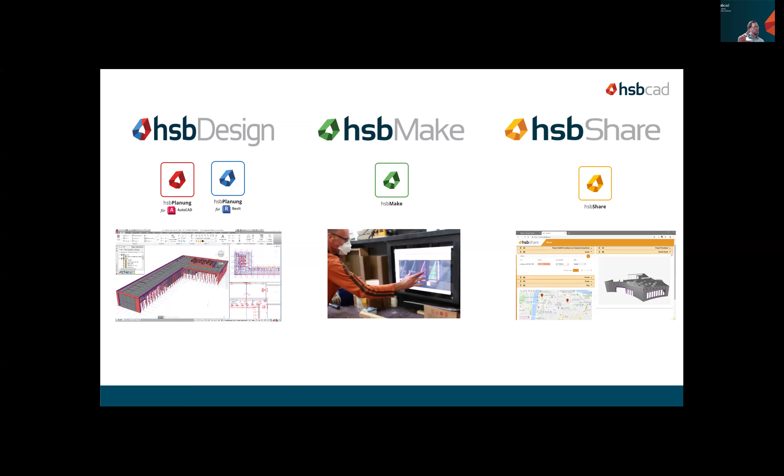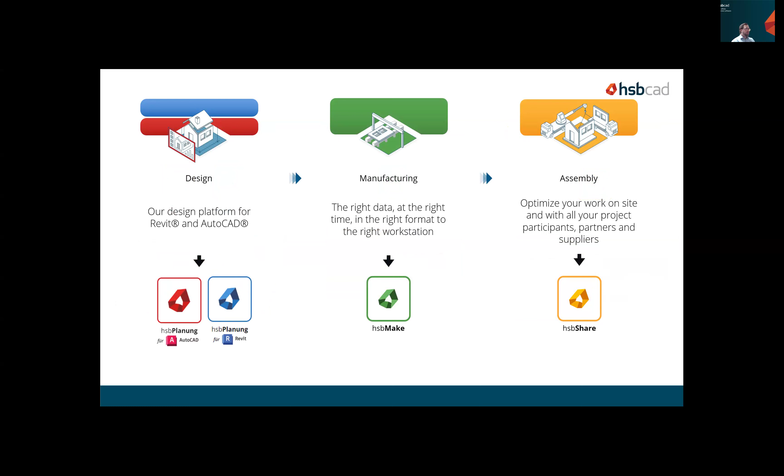This is what I'm explaining before. In design, this is the platform for Revit and AutoCAD. Make is for manufacturing, and share is for the assembly part, to optimize your work on site, and you can share it with all partners, suppliers, and stakeholders around the projects.

We offer solutions for timber engineering, and another very important market for us is the CLT market. A lot of CLT producers around the world work with hsbcad. It's a very good benefit for our customers who are also working with CLT. The export and import of data is then very easy and simple, so you can use a lot of tools from the producer, and it makes things very easy and fast.

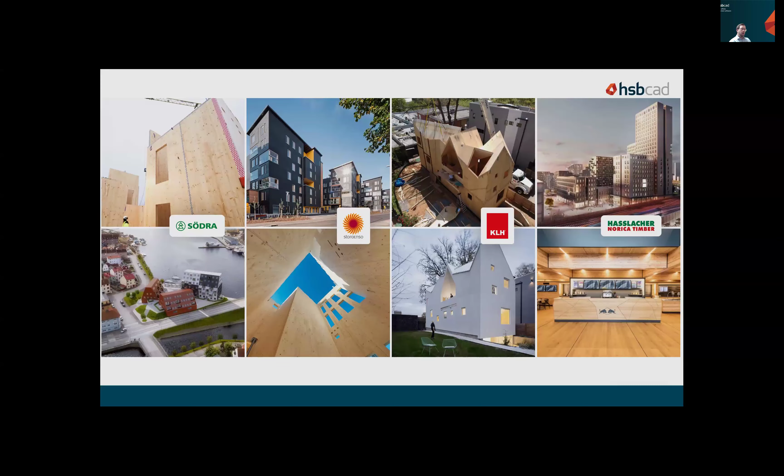Here's also a small overview of our reference customers in the case of CLT, and this is our small overview in general. Our idea was to create not so big a PowerPoint. We will spend more time in AutoCAD and in Revit. Some slides about Make, also a more general overview.

Make is our solution to handle your whole production. From the workflow, I think for most of you, you start from zero with your own project, or maybe you get a project from your architect. The data from the architect or your own project you can import into HSB design, and from design we have an interface to Make, and we will send it to Make.

And in Make, we can handle your whole process in production. We have different tables, you see it on the right side, different tables in a production. If we talk about the table in Make, we call it a client. So for every table you have a client, and in every client you have the option to handle your tables.

For example, in the first station table client, you cut all your beams for your project, and you will send it to the other tables where you have maybe the framing, or you add some window modules. In another table you put all together, and in the next tables you have the first sheet layer, the second layer, maybe you have to flip the wall. This is all what you can manage in Make.

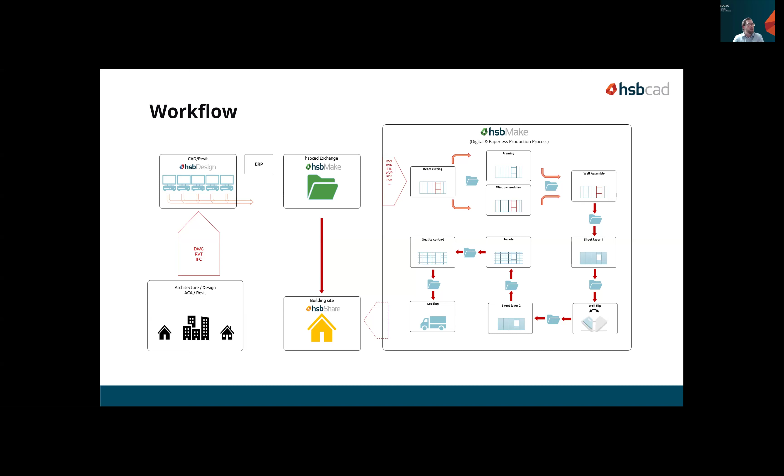Make has a very big potential. In Make we use different clients - we have loading clients, module clients, nesting clients. You can use the clients for your quality management, to create CNC files and data and manage them, and you can use a client also as a PDF or DXF viewer.

From Make we have two solutions: the big one, the server Make, and the small one, Make Lite. Make Lite is also something we want to present you later. What we want to show you is the HSB Make viewer client. In the viewer client you also have a lot of options.

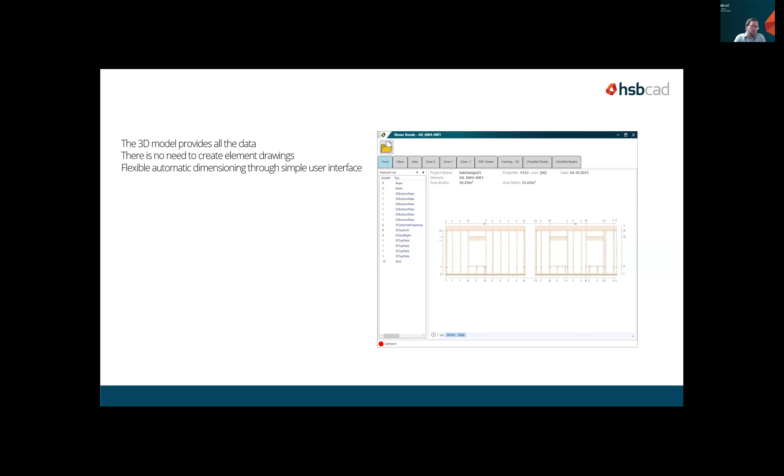You have a checklist, you have the 3D model, you can check different sheet zones, and your colleagues in the production can use the client also. And if they use this client, it is not important anymore to print any plans or drawings on paper, so you can produce everything paperless.

Before we go into the ACA presentation now, does anyone have any questions at the moment? Okay good, nobody has any questions?

Then I will jump to ACA.

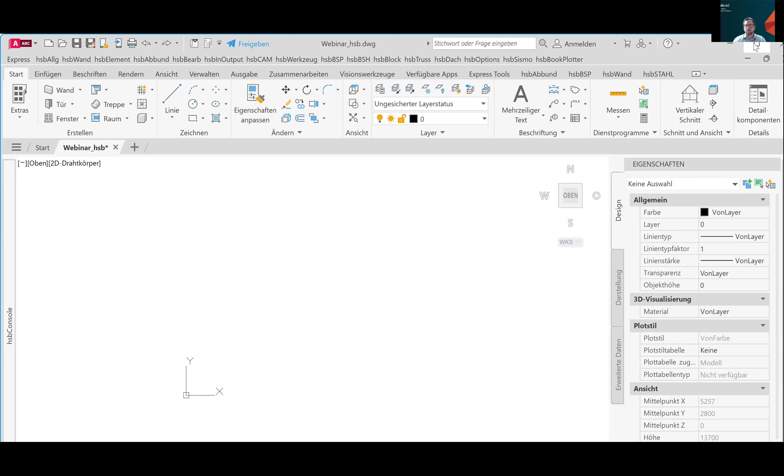Can everyone see the ACA screen? So we can see the screen, René. Yeah, okay perfect. What do we see? We see the ACA.

Maybe one of you already has some experience in AutoCAD or here in AutoCAD Architecture. What you see is the complete AutoCAD Architecture - the ribbons, the commands, it's all the same. You can use it with your experience in AutoCAD, then it is AutoCAD.

What we do with our plugin hsbcad is we have our own ribbon here on the right side, where we can find and use the AutoCAD, the ACA, the hsbcad commands.

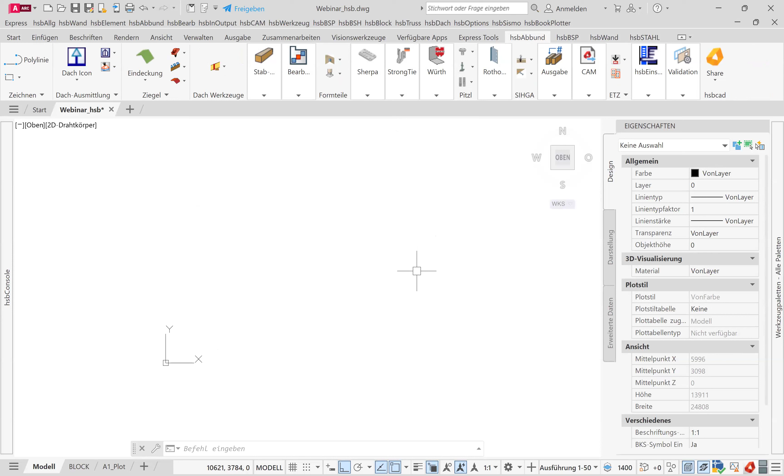I will show you a little bit how you can work with hsbcad and AutoCAD. My idea was to create with you a small house as an example. I think for most of you this is often the same - we will start from zero, and I will create a ground plan for our house, starting at 0,0.

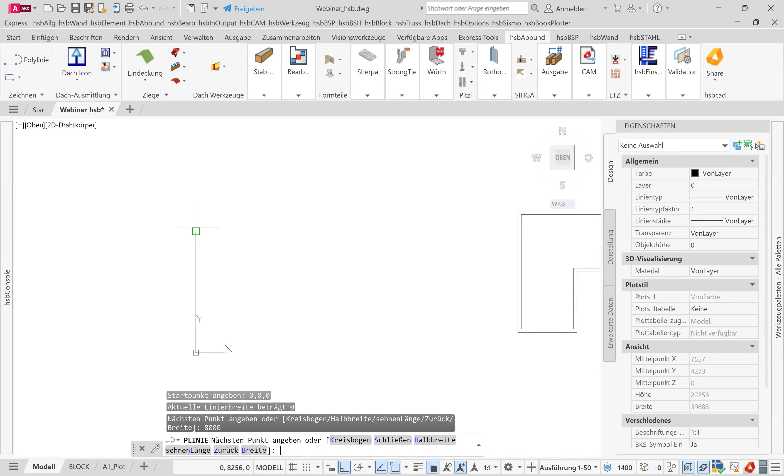Now I need it here, here, and we will close the polyline.

This is how it looks like if we create our ground plan in the first step. And in the second step, I will add some walls. In the background, we have a HSB wall library.

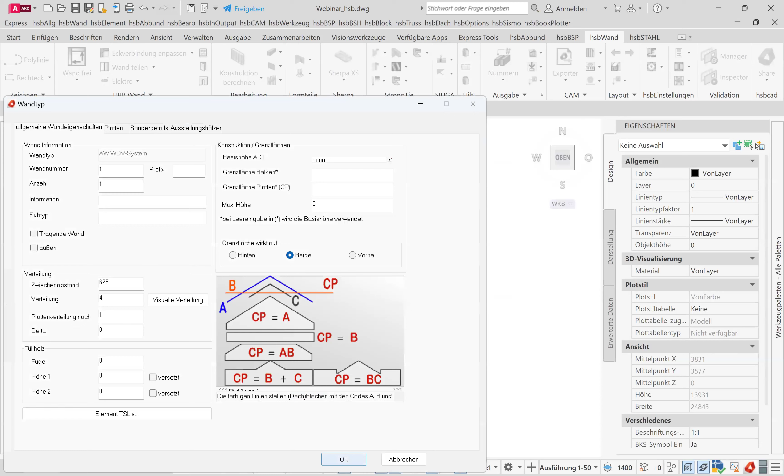We go to wall, create a wall, and this window comes up. In this window we see 3 wall types, but these 3 wall types are only an example from our side. If you use hsbcad, you will have the wall detail builder in the background, which allows you to create your own wall styles. You can create all of that what you need. And I will add this wall, starting from 0, to show you how easy it is.

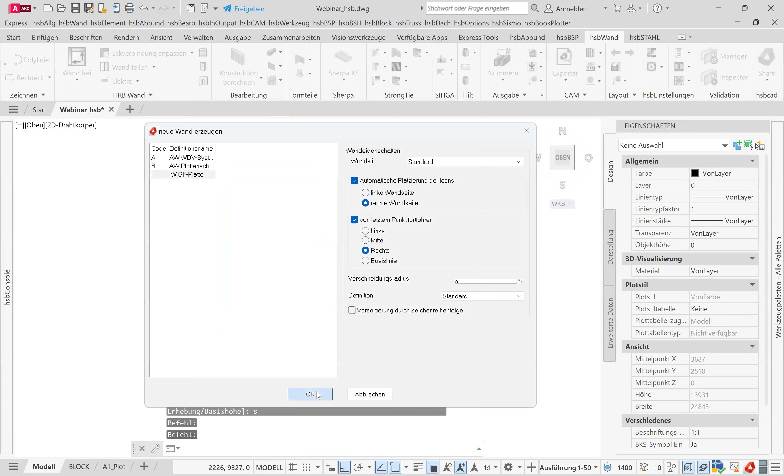Left side. Now I will walk around with my walls. This wall, this, and I will close it. Now I create the walls in the first floor. I will add one wall more. This side to that point to this side. So now we have different walls.

This wall already knows, okay, I'm a hsbcad stick frame wall, and we start from 0. If you get a drawing, for example, from an architect, which is using also AutoCAD Architecture, it's no problem. So you don't have to start from 0. You can use also the walls from an architect.

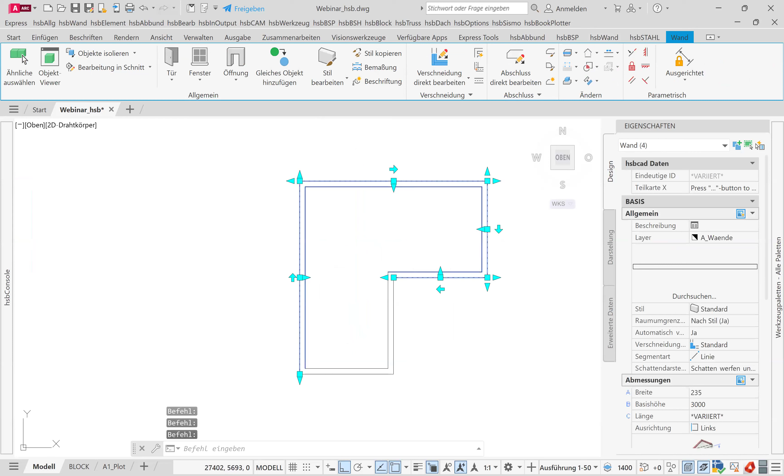I create here on the right an example. It's the same ground floor. What we have here is a standard AutoCAD Architecture wall. At the moment, this wall doesn't know what kind of wall I am. Maybe I'm a brick wall or I'm a stick frame wall. Nobody knows. We can add the wall information also on existing walls.

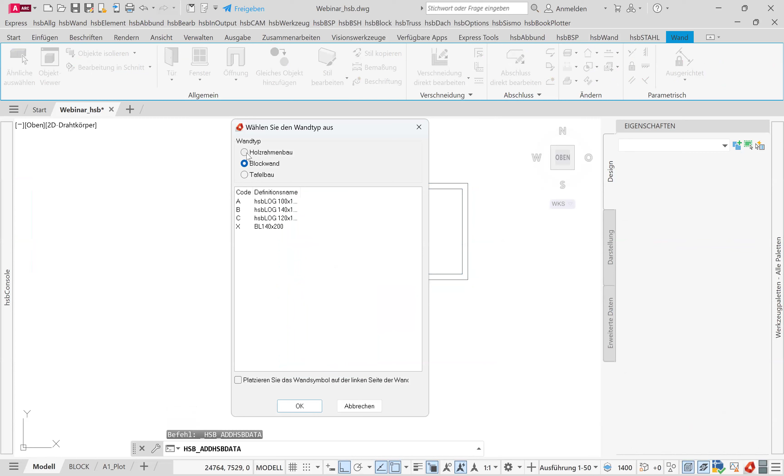For this, I activate these walls, for example from the architect. I make a right click, add hsbcad data. I will add this type of wall. Okay, and now you see you get the same view like here. Now we add all data from hsbcad to the wall. As an example, I can calculate this wall directly, and what I get is a finished stick frame wall.

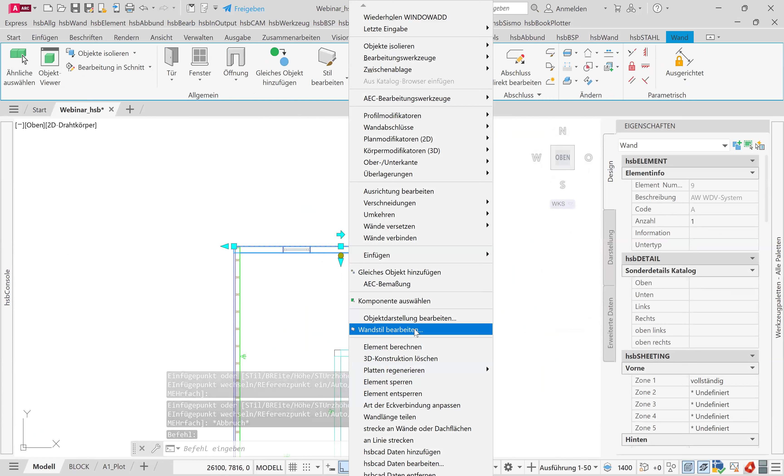It will also work if, for example, the architect adds some openings like windows. I will add some openings here and there. All the information about what kind of wall it is, and the opening information, is in the background in the wall detail builder, and the wall knows how it has to look like.

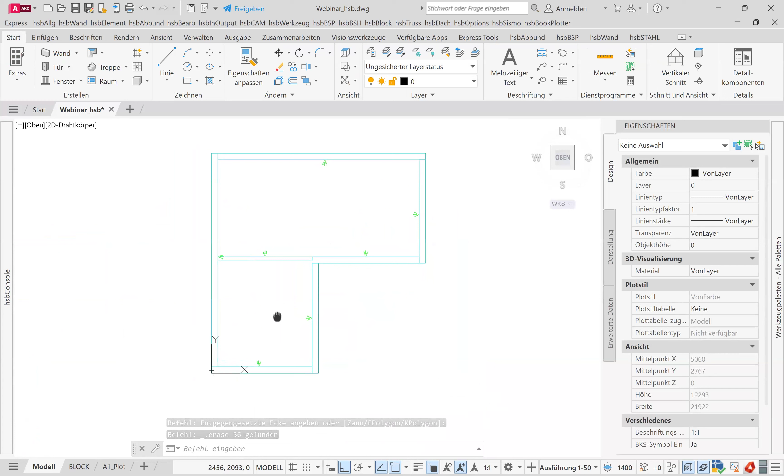I will view from the top again. That's only as an example. I will delete this and go back to our module. In our module, I want to add also some openings. Something in the middle - I have a window here, there, and I will add also a door.

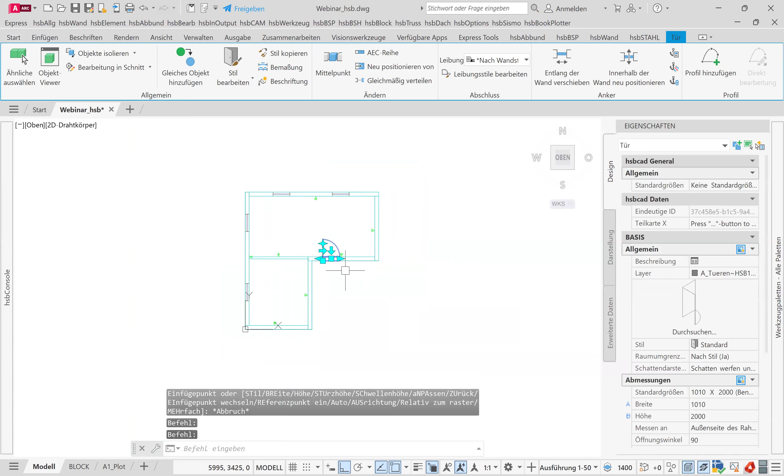Here, open this there. So now we have created our walls, our standard walls, which have the hsbcad information in the background. We add some openings, and in the next step, if I mean that I'm done, I can go on wall elements. You see on the ground, every element has its own icon with its own information. Every element has its own element number. For example, here it's element A2, it's element A3.

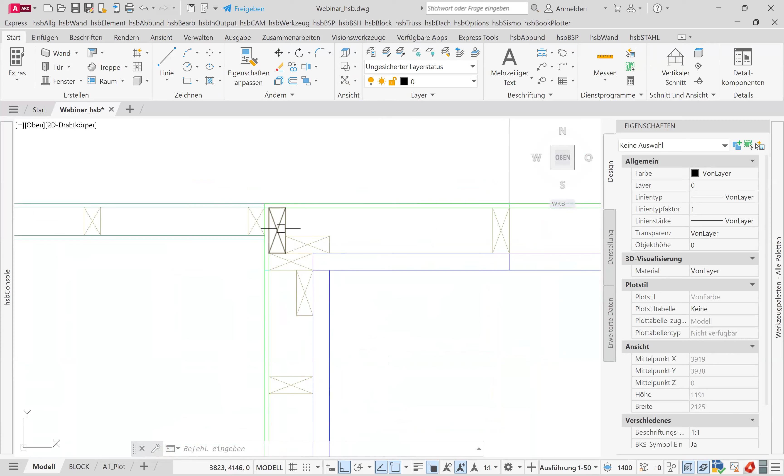This and this. And also right click, calculate element, and we start the calculation. This information comes also from the wall library in the background. You see here, after a calculation, all corner connections, all openings around like a window - everything is done and calculated.

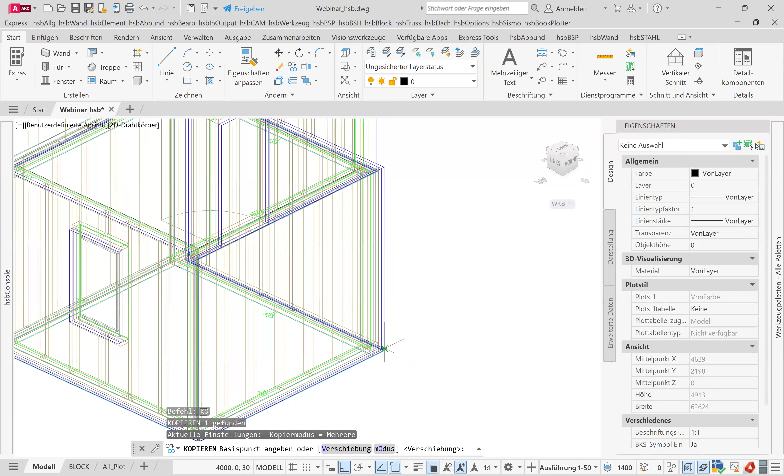Next, I will make it easy. I will copy the polyline from here to there. And the second step, I want to show you how easy it is to create a floor, for example in this case with CLT.

It's also, I go to our ribbon, CLT. I tell HSB I want to create CLT sheets, and this window comes up. Here it asks HSB, okay, what kind of CLT sheet do you want to create? Say we can create a 180 millimeters one. Okay.

So again, I add the polyline. Yes, the polyline is closed. Right click, and I will create the sheets from this to this direction. And in this moment, it is also created. To work or create CLT sheets or panels, it's very easy.

Then it's also a benefit that we have a lot of CLT customers and also a lot of CLT producers. So most of them create their own templates. And if you have a producer and you want to order something there and they are using also hsbcad, most of them deliver templates which include all information about CLT - the height, the size, options to connect the CLT panels. And for you, it's very simple to use it, and you can use the template.

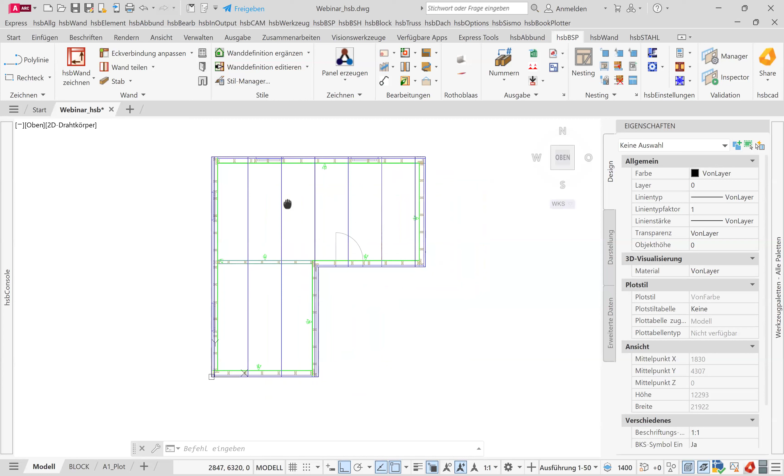As the next step, we have created a floor with CLT, but maybe we need some openings for any pipes or for stairs. It's also very nice. So we'll go to - I will use now, for example, a standard AutoCAD command. I will create some openings in the corner of 100 millimeters.

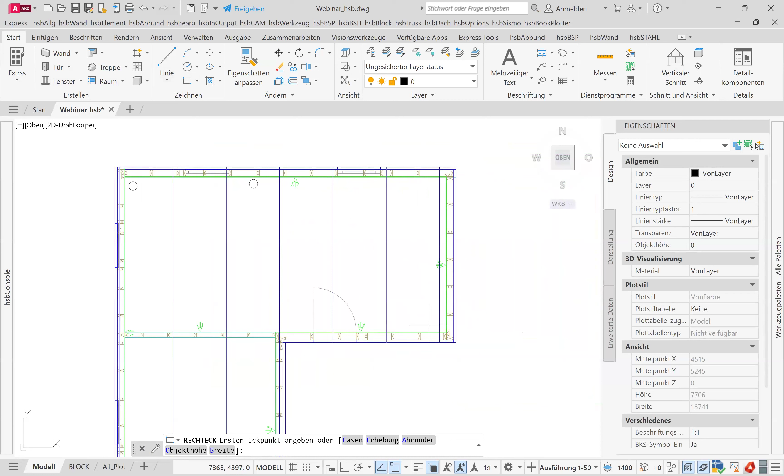Example, we need an opening here in the corner. I will copy them. Maybe we need also an opening here in the middle. And maybe we need an opening here in the corner.

Maybe over 2 sheets, we need an opening for a stair. I create this here with the standard AutoCAD commands, the circle or the openings. And now I can activate my panels, CLT panels. This one, this also. Right click.

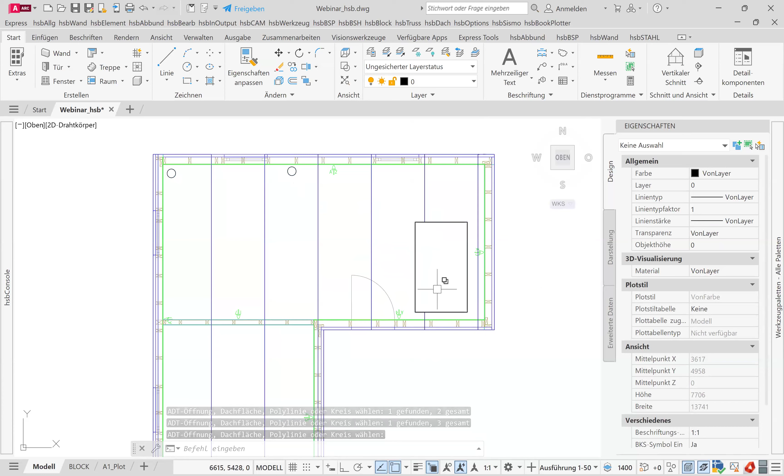Now I can say I want to add openings. Command here, and then I activate with a left click the openings. With a right click, I say right, I will add openings. Then they calculate it. You see it, for example, here the line is cut. And now all our openings are in the CLT sheets.

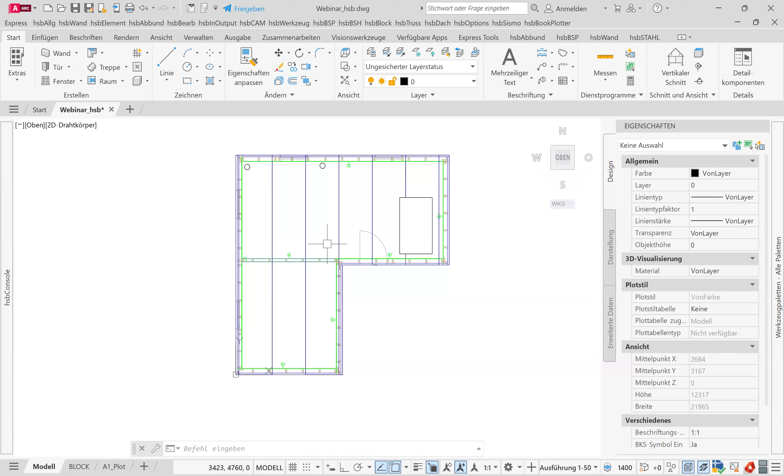So we have a ground floor, we have a floor here, and now what we need is a roof. For a roof, we can use also our walls. We have different options to create a roof. For example, I will open it.

First of all, we have to add a roof icon for our roof, for example, have 35 degrees. The gap is 500 millimeters, and I will measure the height in the wall again. It is from 0 to here. All right.

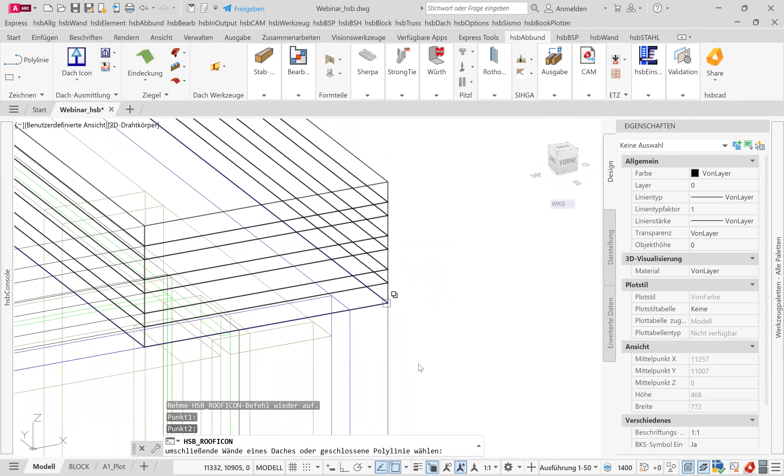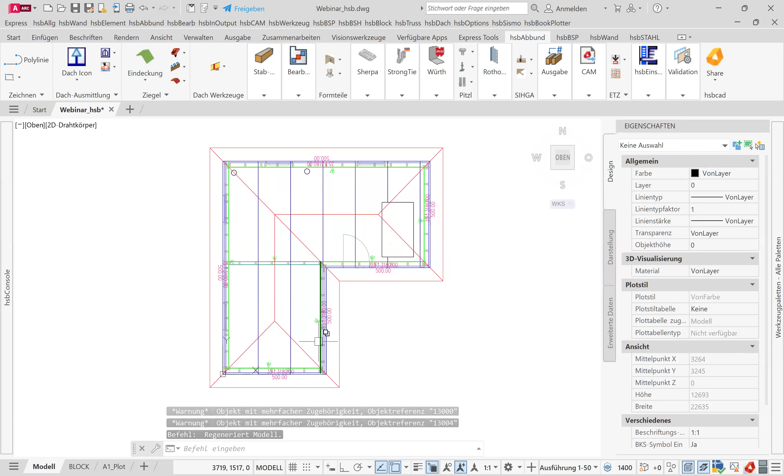Polyline, like the roof icon. In the next step, hsbcad calculates the roof for the house. Now I can add the icons here. Click this one, and this is the right click. There is no angle here. Yep. So, and it is done. First view.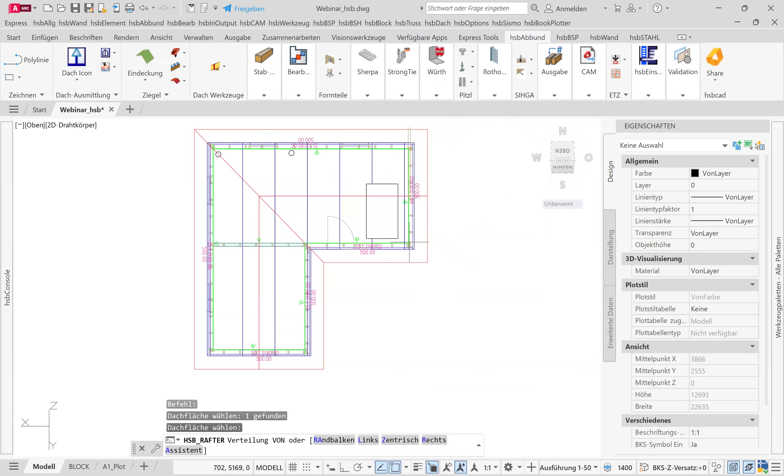In the last step, we will add some beams to our roof. Start with the standard beams. I add the roof, then I add my information, what kind of beams I have. And then it's the same like with the wall. I click the first point, and then I walk around the roof. And then it creates automatically the beams.

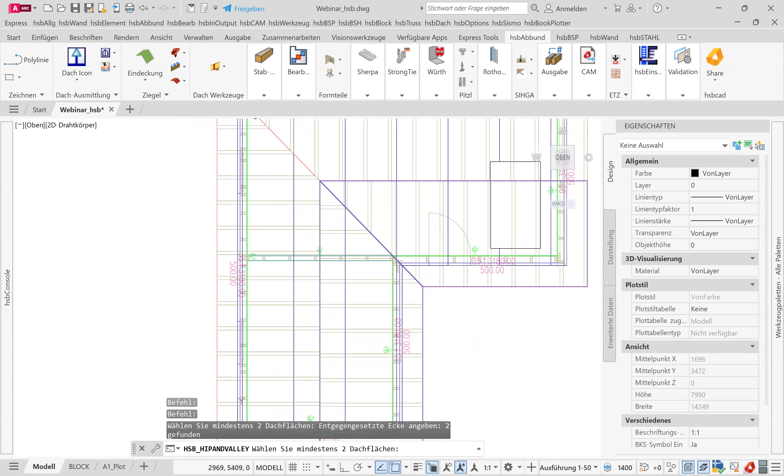To here, to here. First step. The next step, you will add the hip and the valley rafter. I activate 2 roof sides, I say yes. You see it automatically if it's a hip or a valley rafter. And I will add the beams.

No. First beams, and also 2 types. Okay, here also, and with these steps, it is very easy for us to create walls and the roof, openings, the CLT stuff.

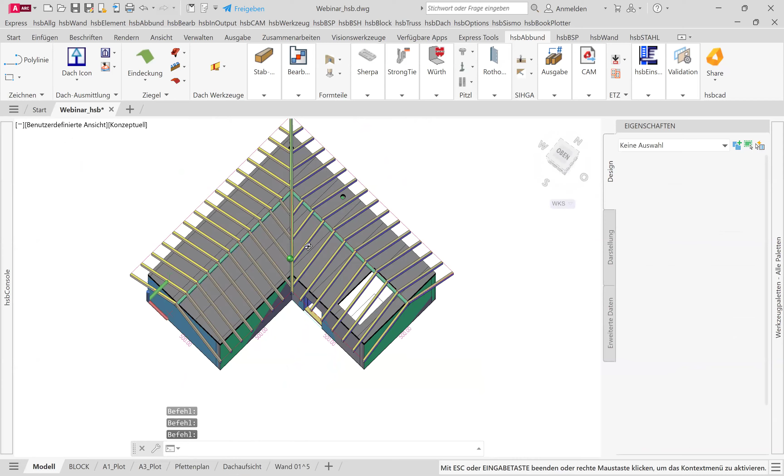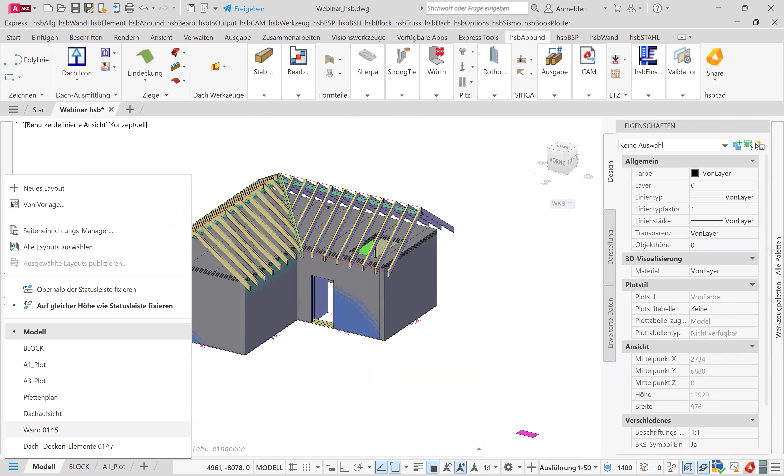And everyone see here, the wall elements, something what we can see also in the layout. So everything here. So what our walls also, everything is done for the layouts in the background.

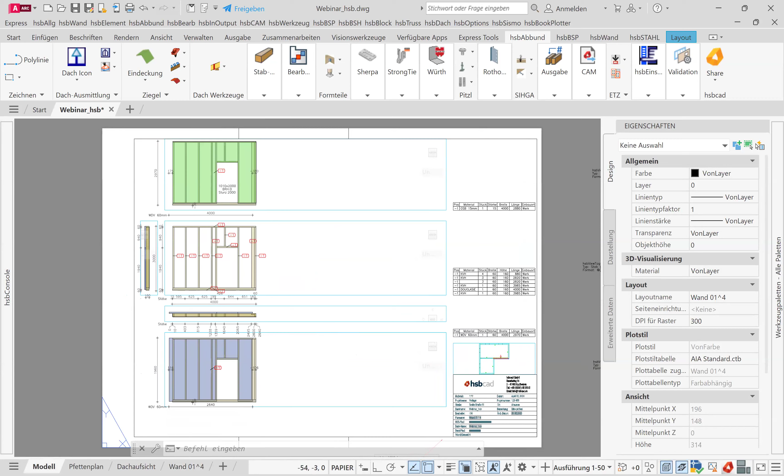So now we have an option, we can print the layouts, or this is something we also can send to make, for example, if we want to produce paperless. And yeah, from my side, this was a small overview about how hsbcad is working in AutoCAD architecture.

We have also the option to add different connections like Simpson Strong Tie or Würth Sherpa. We can add different tools for beams and sheets here. So there are a lot of options what we can add. We can create glue lam beams. This is a different tool set what we have. So we have a lot of options for the wooden house industry and carpenters.

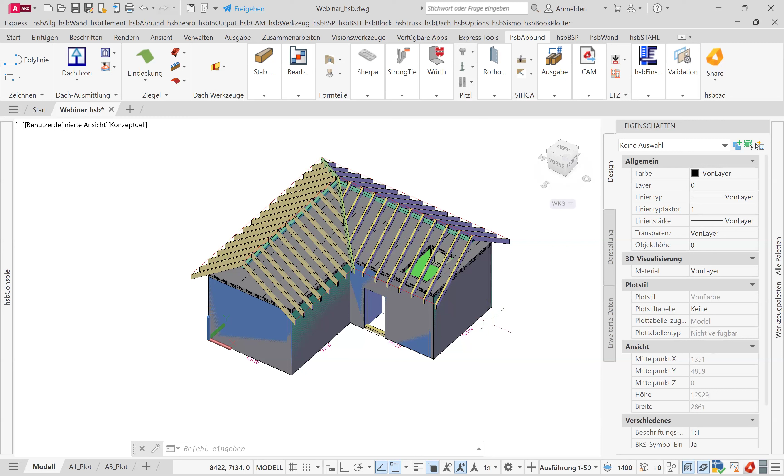Okay, then I guess it's now time for my Revit presentation, right, René? Yeah. Okay, so I will share my screen now.

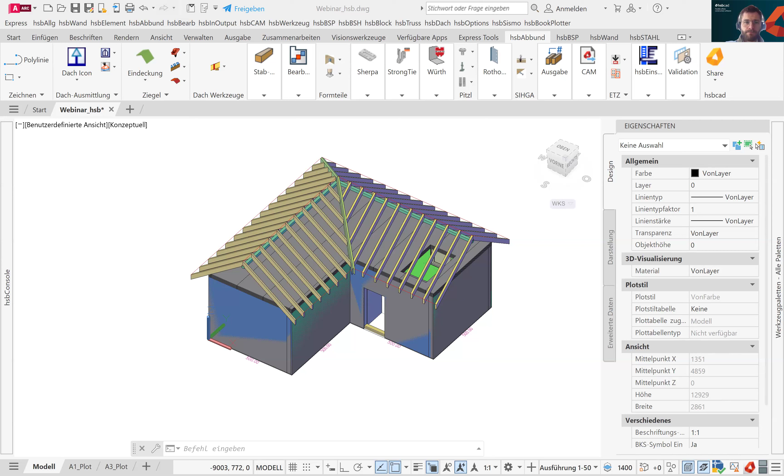So yeah, hello again from my side. I will show you today our HSB design for Revit solution. So what you just saw was the AutoCAD application we have, but now we move directly to Revit. And as you can see here, we have 100% plugin or 100% application inside Revit.

So you see I'm here in the native Revit environment. I have here my structural ribbon, my architectural ribbon, my structural ribbon, all in all. Do you see my screen at the moment? Yes, yes, yes. Okay, okay, I was not sure. Perfect.

The strong side of Revit is, despite being an architectural design software, you also can design steel components, you also can design MEP connections. But what's currently not possible in Revit is creating a timber or timber frame construction. For that, hsbcad developed its HSB design platform, and with that we can create stick framing inside Revit. So everywhere where HSB stands in front, there are timber functionalities behind.

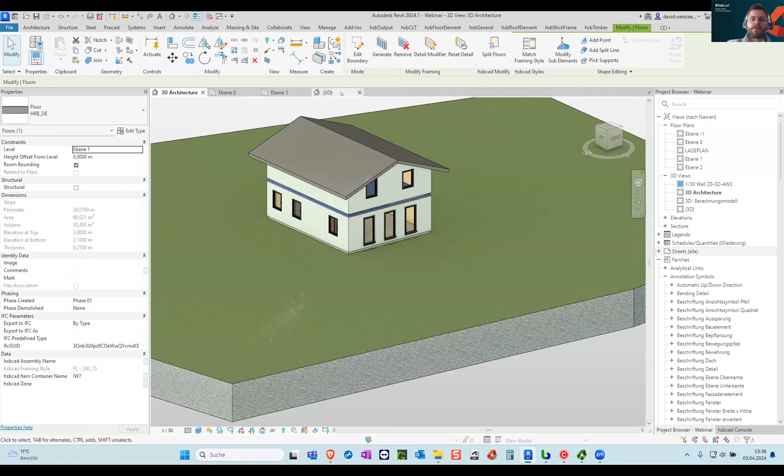Great. Okay, so what you can see here in my 3D architectural model is that we use here native Revit walls, native Revit windows, native Revit roofs, and native Revit floors. I will now show them here inside this structural model. I will, for example, show you the walls. And we also created here

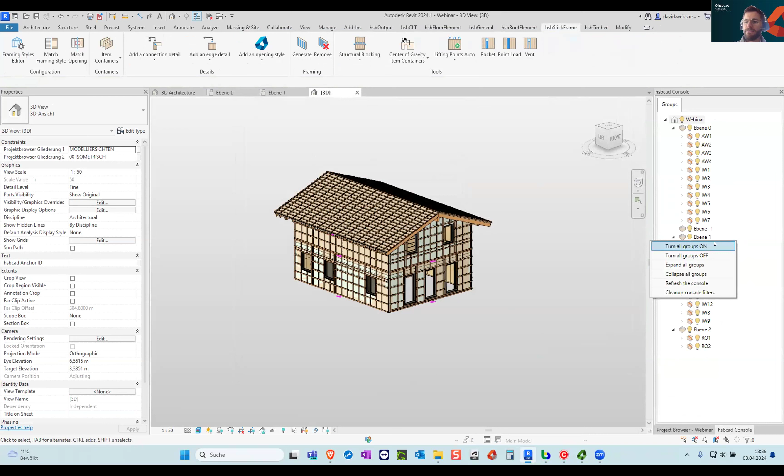hsbcad console, which is a second filtering tool. So I turn everything off and I just show you our ground floor. And if I here click on our item containers and, for example, remove the construction, you see here the construction is deleted. I also can regenerate here the construction and automatically the walls will be framed.

As you can see here in the loading bar.

Of course, these walls are framed on certain rules. These rules are defined in our framing style editor. The framing style editor is actually a library where you can set the rules for how walls, floors, and roofs are generated.

So you can see here in the framing styles, I created different kinds of groups and I put different kinds of objects like a wall, a floor, or a roof inside these groups. We'll come back to the groups later.

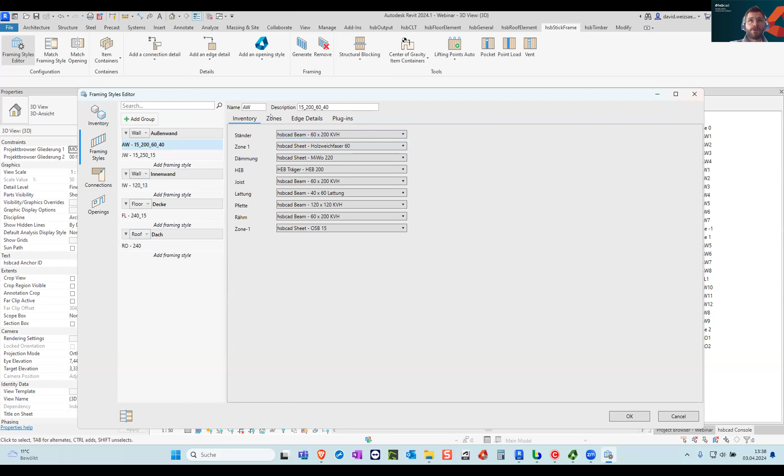In this tab here, in the inventory, I add beams and sheet families, structural framing beam and sheet families, to these names. And after that, I can then use these beams and names inside my construction. So you have here a small overview of the wall.

And if I'm adding a zone - we call the different layers of a timber frame wall zones - then they will be added to their construction. All these zones have zone fillers, and all these zone fillers have different parameters we can set up here.

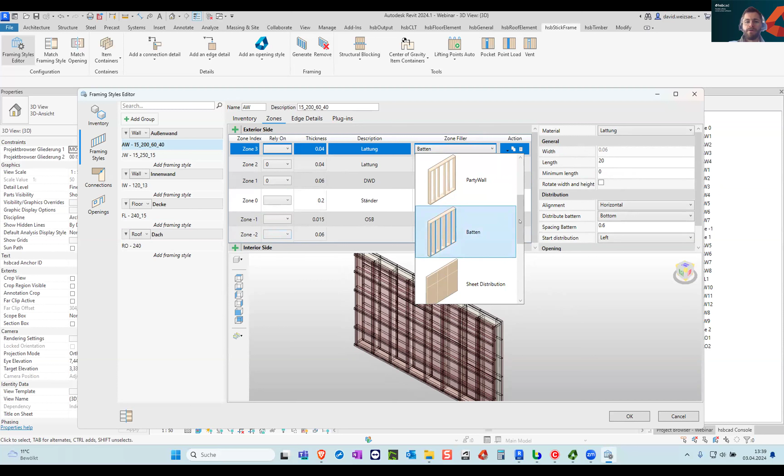So for the battens, for example, I have different parameters than, for example, for the sheets. For the sheets, I have then again different parameters I can set up.

After we set up all the walls, the floors, the roofs, we can then create edge details. So this is actually like a view, like we would stand in front of the wall, and then you have different connection points at a wall. So for example, you have the bottom, you have the top, you have open ends to the left, to the right, and you have as well angled details.

All these details can be manipulated. We can go in here, we can add extra beams, for example, we can rotate the beams, and we can use our anchor function to make these details parametric. So it's not only to use these details for one wall, you can then use these details for every wall, not depending on, for example, the size of the structural framing beams or of the sheets.

We can also add some tools like milling, cut, sheet cuts, and drills. And we can define, for example, the core layer. So this will show how far, for example, the studs are going.

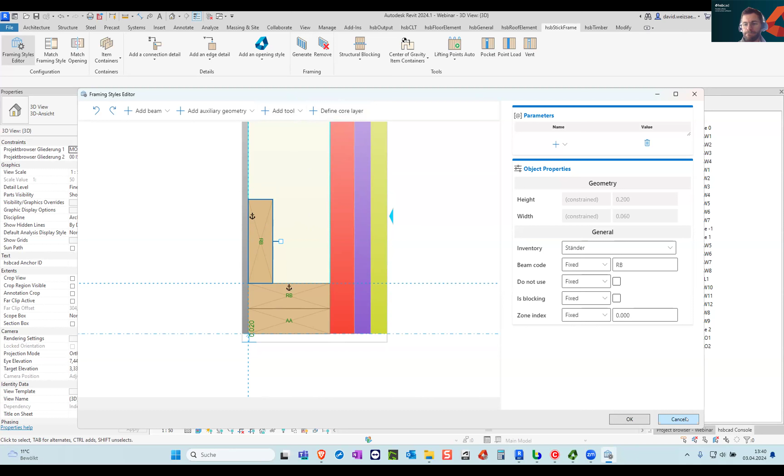I will click cancel here because I want to keep my already existing detail and then show you the connections.

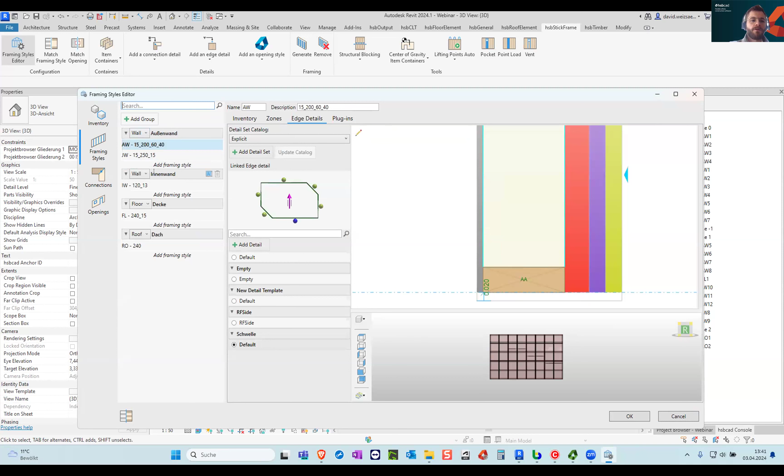Here now the groups I mentioned earlier are taken into account. So here you can now create connections between groups. So you see I created here one wall group and one wall group. So now I'm in the wall-to-wall connection. I have now, from this kind of connection, 4 connection possibilities I can manipulate.

So I click here on this pen, and then you already see I'm back in this dialog I was before, where I can add beams, add millings, define the core layer, and so on.

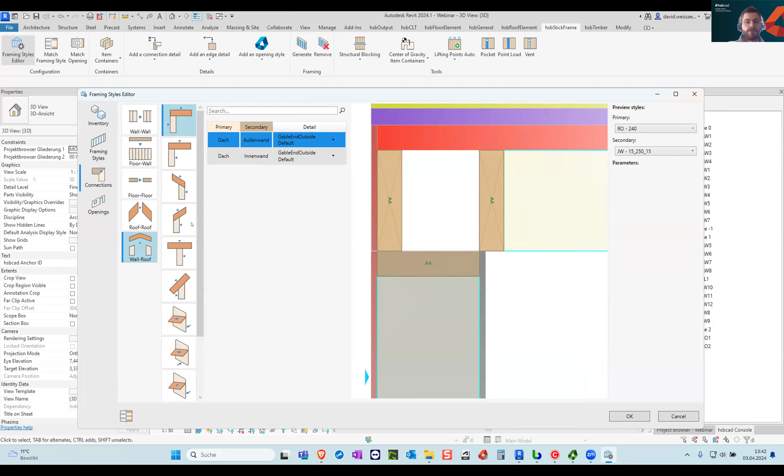But we cannot do just connections between wall to walls. We also can do connections between floor to walls, floor to floors, roof to roofs, and wall to floors, wall to roofs. You can see here we have for all these connection details different kinds of connection options which we can manipulate.

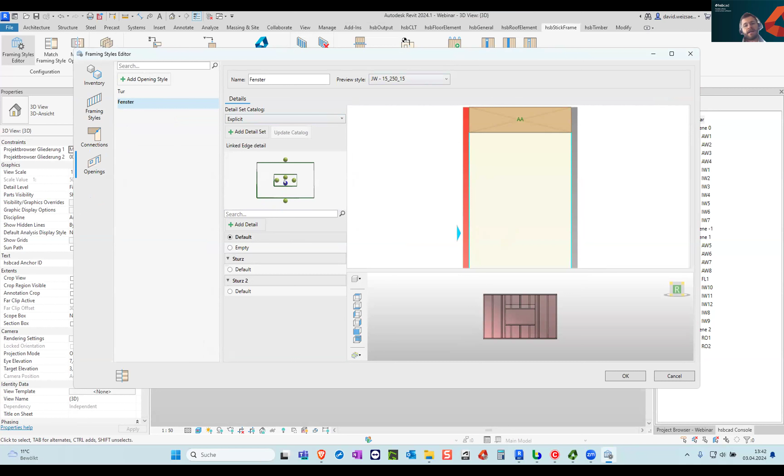At last, we have here the opening tab where we can create opening details for your openings, windows, doors in your model. So we have here again the sketch which we had in the framing styles earlier. So you stand in front of the wall and then you have different connection points around the window. And we can all manipulate them again with this pen, go in here and use the same functions.

So when we have set up our framing style editor, our internal library, we can go back to the model and generate the construction.

This framing style editor, of course, you just have to do once. You don't have to do it every time. In our ribbon hsbGeneral, you can import and export framing styles as you want. And of course, you can put the framing style editor in your template drawing and have them always available in your drawing.

As you can see here, I also inserted pipes. So these pipes are - one moment - system parts like MEP parts, and we can also create interactions between these pipes and our walls.

I will quickly hide the Revit walls again so that we just see the timber frame construction. And then now I will add this pipe to that wall, or a hole to that wall.

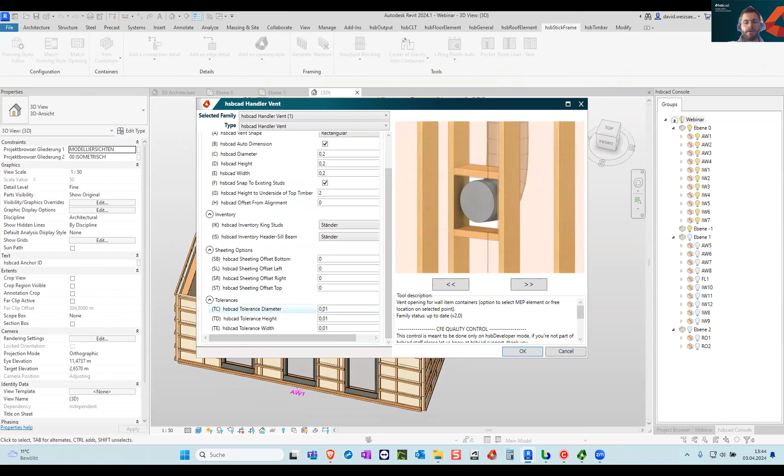So well, here I'm opening the vent command, and you see here now I have different parameters I can set up again. You can click here to the right, and maybe you're already one of our customers, then you know that from our ACA solution. Here everything is explained, so every parameter has an explanation visual available.

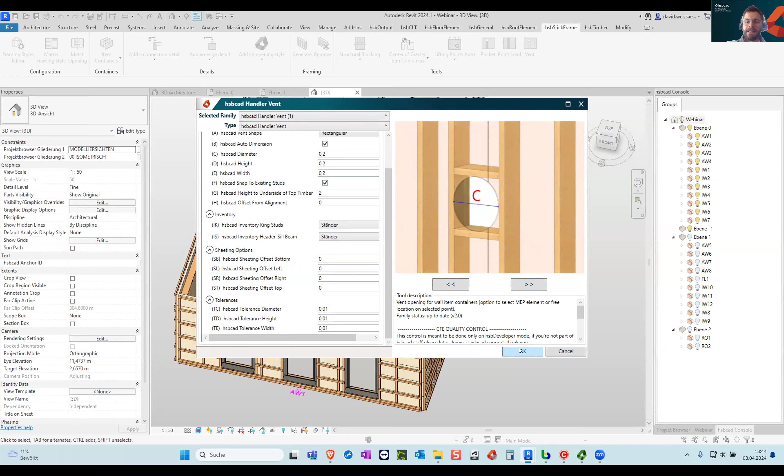So now I select the item container, for example, and select the duct. And now I click escape. And when I reframe the construction here, you will see that this pipe will be around the beams and will be cut out.

All the beams we are generating, if I click on the beam, are separate families. These are all structural framing families which can do the same as structural framing families in Revit, but we add some project parameters. So every beam knows that it belongs to a certain wall, as you can see here, this beam belongs to this certain wall.

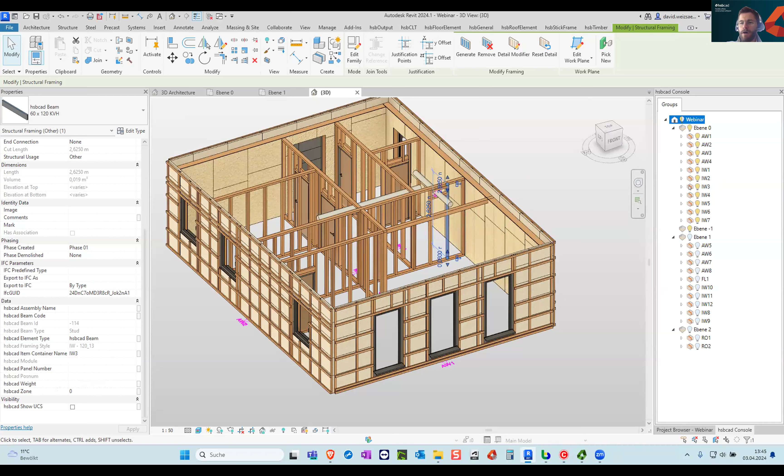With our console, we also have the possibility to hop on directly onto a wall. Not just the wall is added here, we also create the work plane so you can easily and smoothly work inside here, and for example easily move beams and so on.

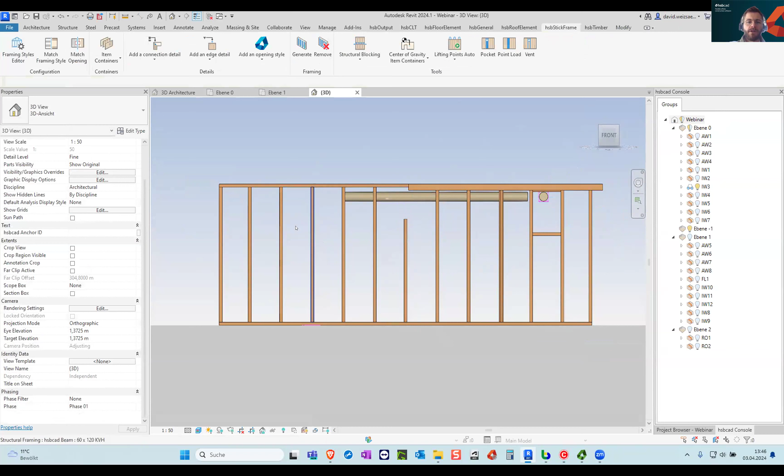So we can, for example, manipulate. We can change the beam type to whatever requirement, for example I change that beam. So every manual change will be recognized by our solution. If I now, for example, do a regenerate, our system, our persistent technology, acknowledges the changes we did and will keep the knowledge.

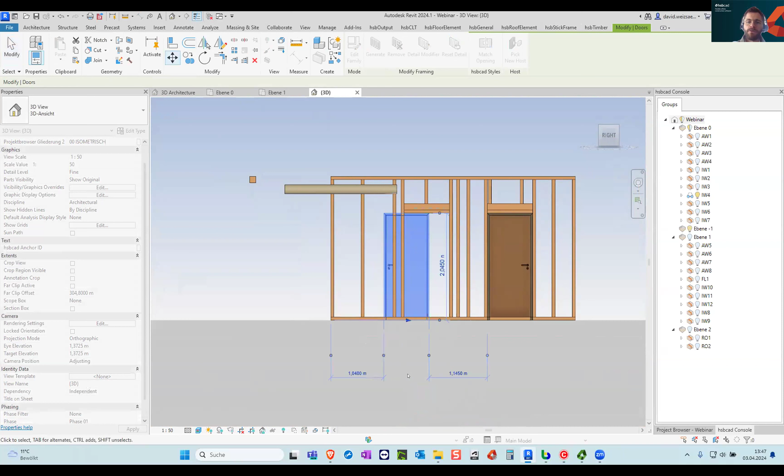For example, if I move a window or a door, let's see, we have here the wall IW4. No, that was the wrong one. This one. And I now, for example, move the door. When I now regenerate my construction, the beams around the door will be updated and moved to this place.

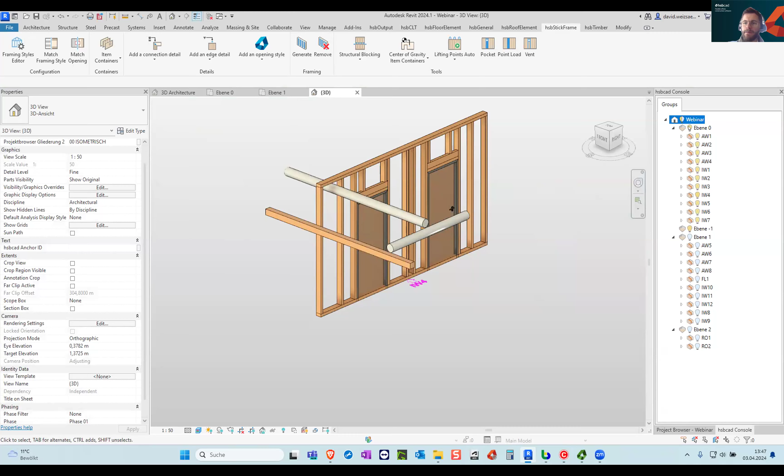Of course, we add here as well some connectors, as you have seen in our ACA solution. So if we go here to the Rothoblaas connectors, I can set here the different types, for example the WHT 440, and then I can add the connectors to different faces of my walls.

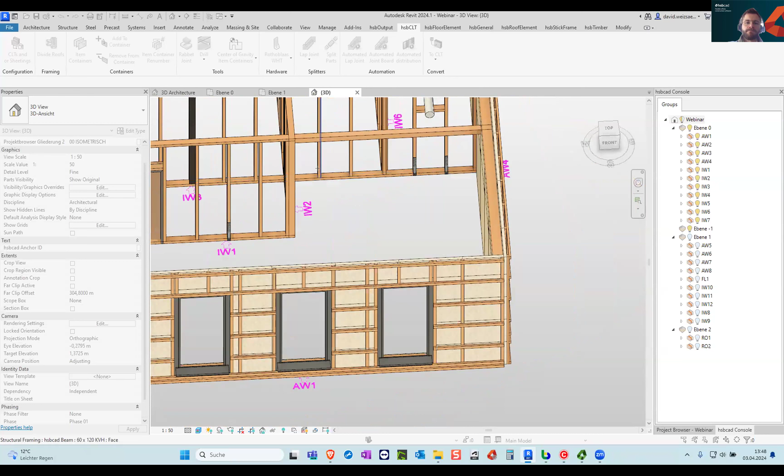Of course, we can also add beam cutouts, for example this separated beam to a wall. For that, we have here the pocket command. For the pocket command, we select the item container and then select the beam. We have here again some parameters we can set up. Say just OK. And then we regenerate here our construction.

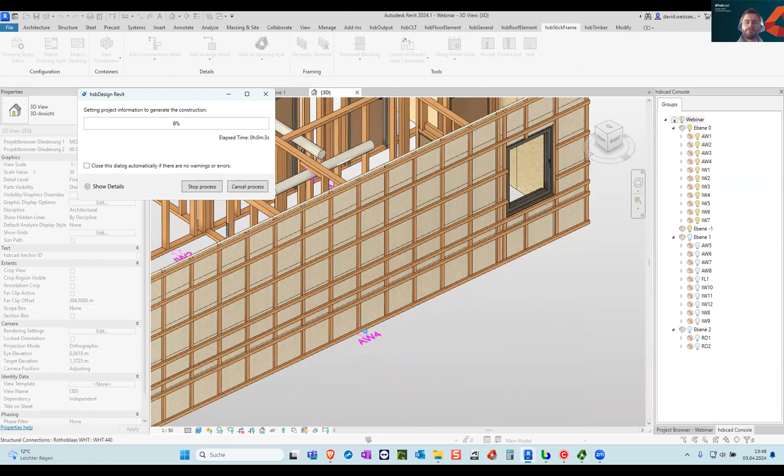And of course, we are in native Revit, so I can always work with Revit filters as well. For example, if I hide all the beams, then you see this setup will create separate beams, which are load bearing then for this beam.

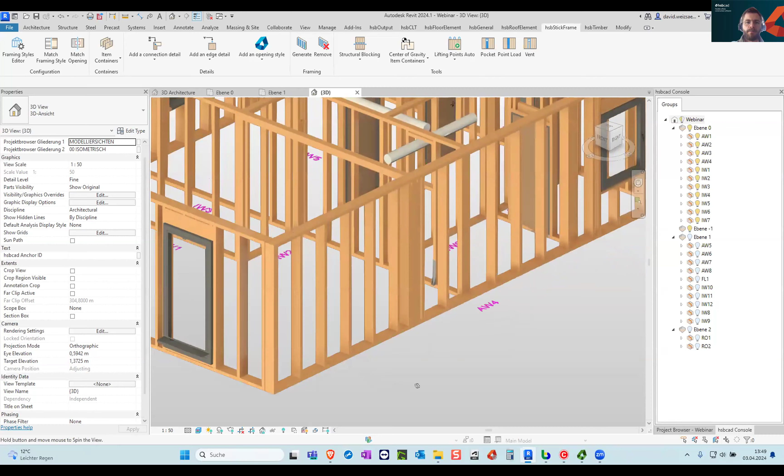Of course, we can also do that for floors and for roofs. So we created, I already created some beams for the roof and for the floors, and this is the whole construction. So I will put on now again the visibility of all the elements, and after generating everything, you will see here the final project.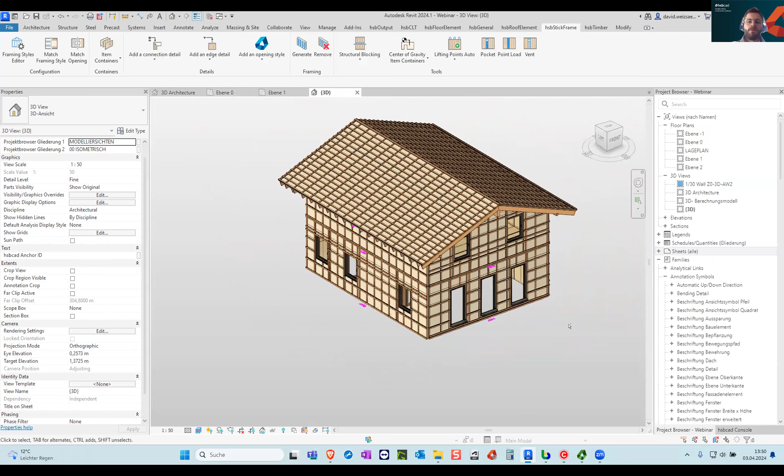Of course, we can also create shop drawings or wall layouts of every wall. For that, I go to HSB output and create a wall container, a shop drawing. And then I create here a shop drawing. Actually, this now will create different views and sections inside the Revit model, and they all will be added here to the project browser. So we are using, again, a native Revit function to create our wall layouts.

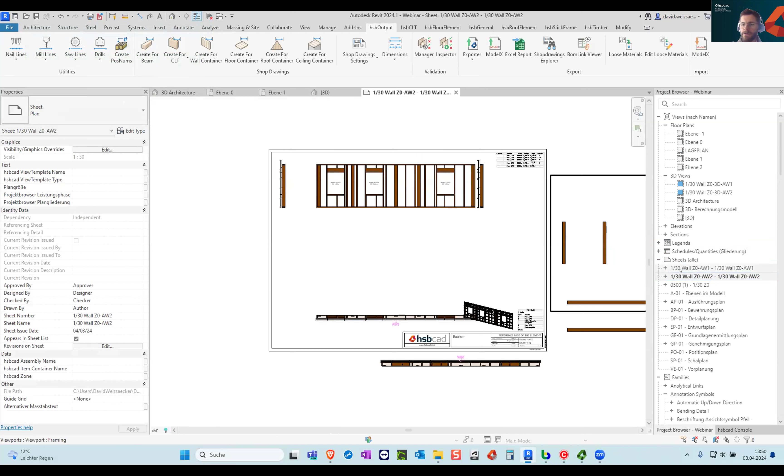So now I go here to Sheets, and I go here to the wall. That was the wrong one. I think that's the right one. And then you see here, maybe I turn that to an A2 drawing. And now you see here, everything is automatically shown, dimensioned, and displayed.

What I recognize now, we forgot to number the project. That's not a big problem, I will just show you for the ground floor. For that, we have here the create posnum, so create a number tab. As you can see here at the moment, all our beams have the value -1. So -1 means the parameter means that our beams are not dimensioned, are not numbered.

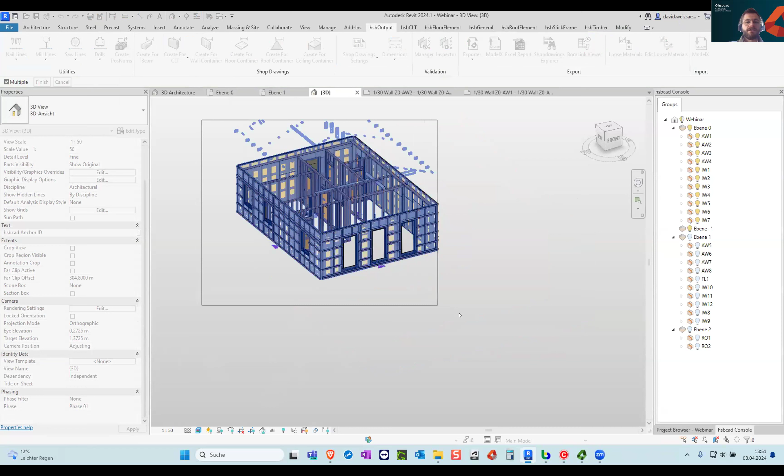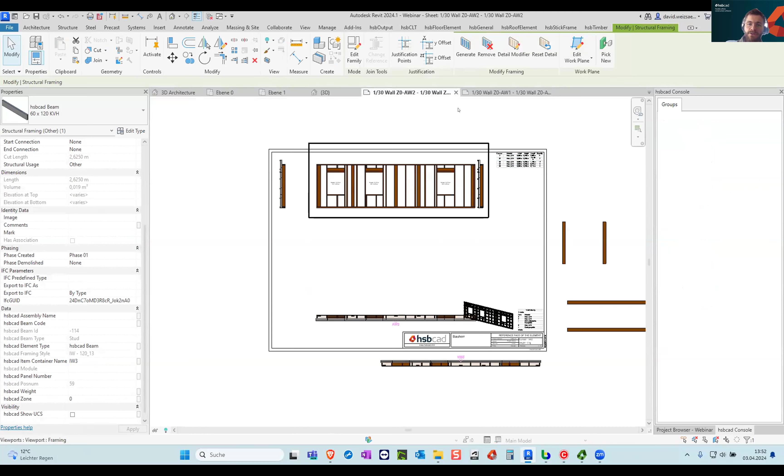So we can use here the command create, select every object and then create numbers. After doing that, if I click again on the beam, you see now the beam is getting a posnum, so now it's beam 59. And if we are now going back to our layout drawing, all the beams get a number in the drawing.

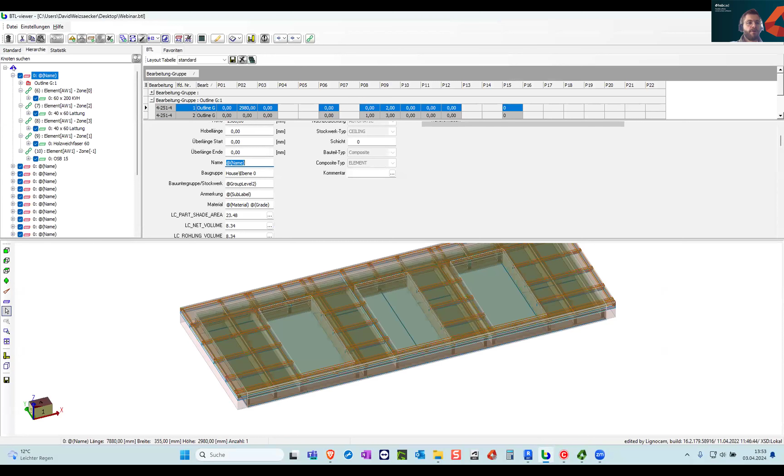Okay, so after we created the whole project, of course, we can export it to different kinds of CNC files. So we can use here our hsbcad exporter, it's actually the same we use in ACA, so it's a proven and pretty advanced exporter. I have set up here some different kinds of exports, and after I run these exports, I then have my whole project here, for example, available inside the BTL viewer. So inside BTL, every wall separated, every layer separated, every zone separated, and with all the commands ready to be cut.

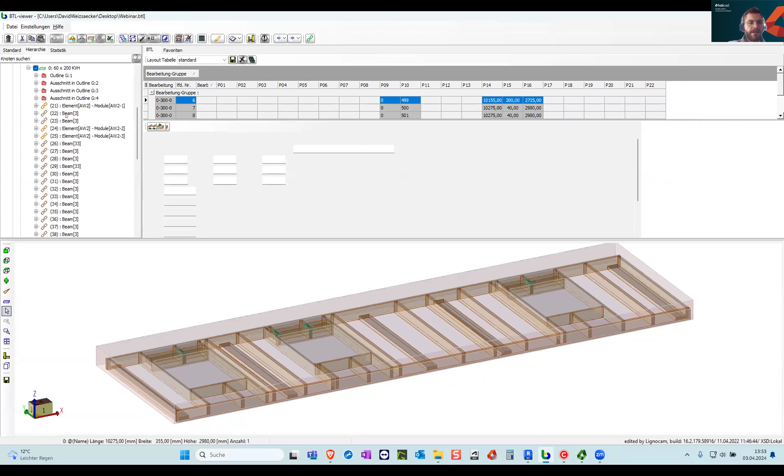Of course, we can do that for all common CNC exports. So as well, we can do it here for the Hundegger BVX. So all my beams, for example, in this case, are then available inside Cambium BVX.

Last but not least, we can do with our exporter our paperless shop drawings. If I click here on load in, I will just load the walls we created into our paperless shop drawings. This is done with one export, and then you have every wall available, as you can see here already. So all my walls are now inside that folder.

The advantage is we have here a list function. So for example, if the worker found beam 34, he can click here on the beam and it will be highlighted in this view.

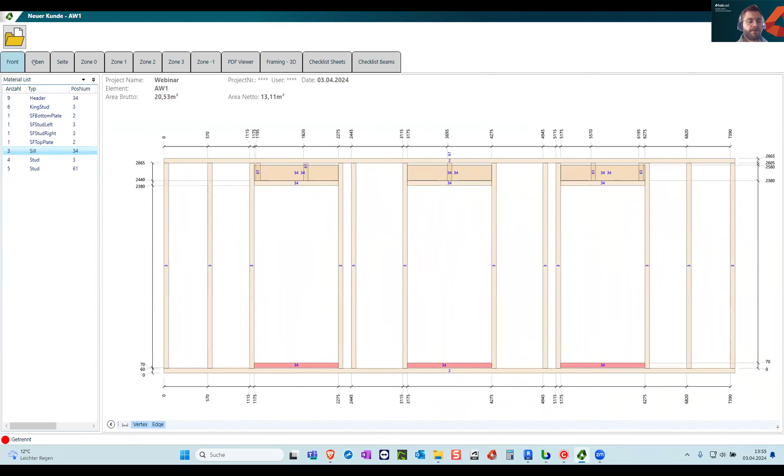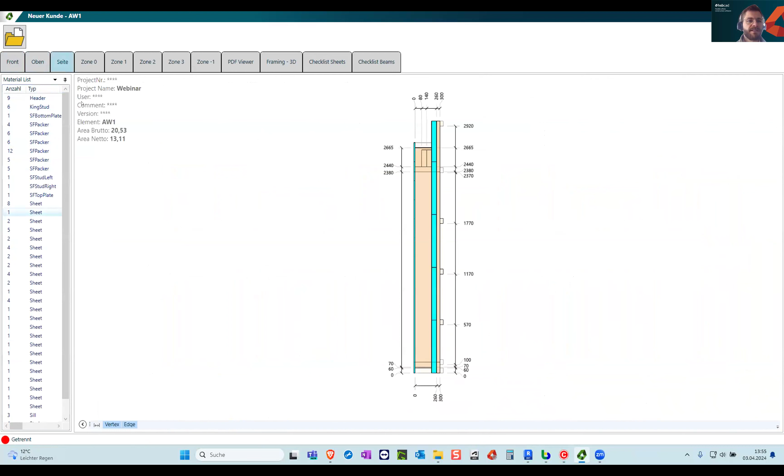It's also good for older workers because they can zoom in, zoom out, move around, and every dimension is automatically created. We can create different kinds of views in here - the top view with the list function, the side view with the list function, different zones with the list function.

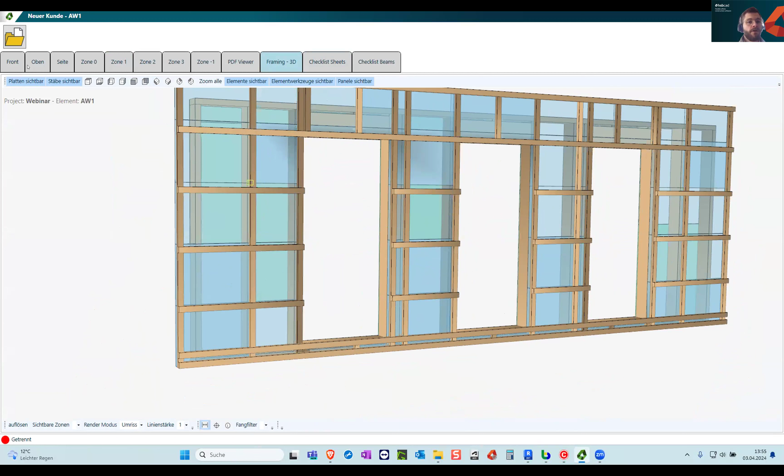And of course, we have here what René already mentioned, a checklist and our 3D viewer, where for complex construction you can zoom around, zoom in, and use our measure tool to find measurements which are probably not in the front view. You can highlight zones, add zones, and further.

Last but not least, I would like to invite you to our hsbcad.com website, where we have further information about all our tools, sets, applications, and solutions. We have here as well a free trial - you can find it under solutions. If you go to free trials, you can download the free trial here for free.

You just go to request a trial, fill in your request and submit it. Then you will automatically get a 30 day trial license available.

I see there are some questions in the chat. I'm now checking them and seeing which I can answer. One moment.

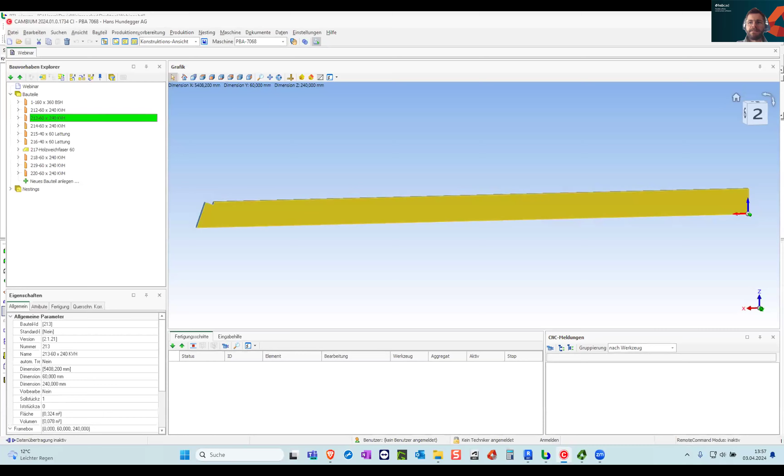So one question is, does HSB have a tool for a quick cutout detail of a random timber element? I guess this is a question for Revit.

In our HSB timber, we have different tools available to manipulate our construction. We have the box cut tool, for example, where we can create a rectangular box cut. We have an arc tool where we can create an arc, and a multi-cut to cut multiple beams at one location. And we have our famous beam cut, where we can do male-female beam subtraction.

So do you have maybe some more questions regarding Revit? Here's one other question - yep, the trial is the full program, so you have access to all our design tools.

You don't get access to our CNC interfaces. For that, you have to write us a direct request, and then we can see which CNC files we can make available for you.

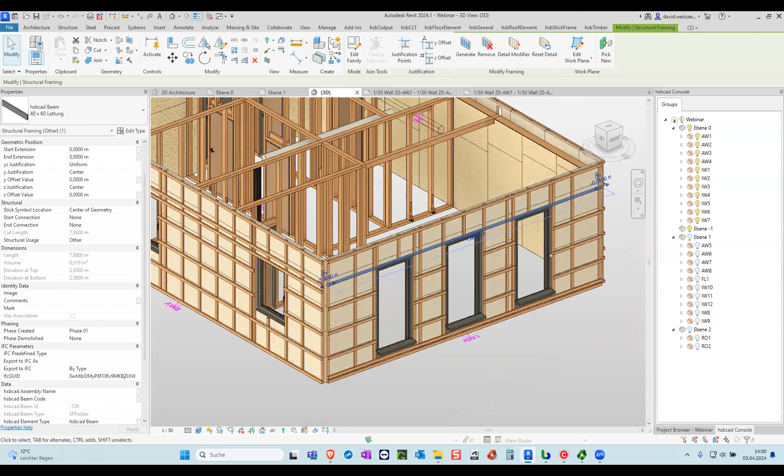One more question was, can you do frame tolerance around the window? Yes, of course, that's possible. You can set up a tolerance inside the window family, or you can set up a tolerance inside our framing style editor in the opening tab. And yes, export to IFC is of course possible.